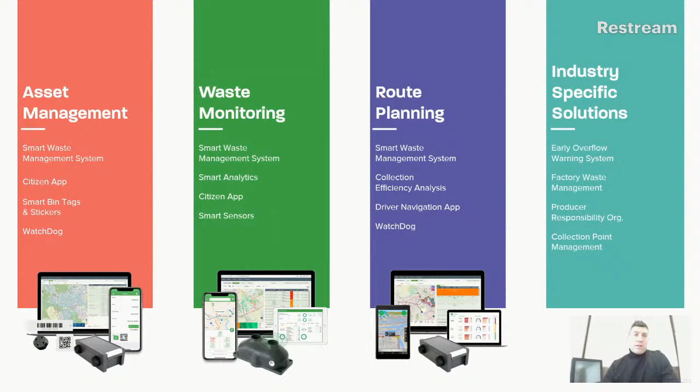Here is an example of how the sensors actually work, looking down into the bin. This is specifically a semi-underground bin, and in combination with the citizen application, a household wanting to deposit trash in the nearest container can check the citizen application, which is free for download on iOS and Android, to find which container to use and which is nearest.

You can see the position based on GPS location, and decide by checking the fulfillment level of each container. If you want to deposit paper and see the bin is full, you can choose another position, then find there is only 50% fulfillment, so you can decide to go there.

The citizen application also offers reporting and maintenance functionality, meaning every citizen can provide feedback if the stand was polluted, if it was full, or if there is some issue around it that needs to be solved by the waste collection company or the city.

For our smart sensors, we chose ultrasound technology, which we believe is most reliable and resistant to dust and dirt. We've seen laser technology options in the market, but they don't fulfill our expectations. Ultrasound eliminates service occasions where lenses would need cleaning, so this is a quite reliable and working solution.

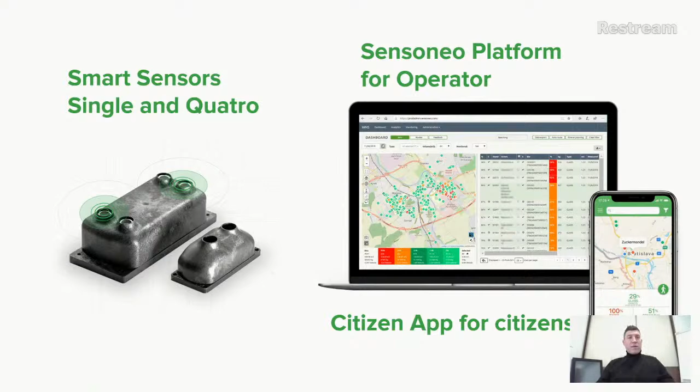Overall, the solution with these ultrasound sensors is that they are mostly inserted in the middle of containers to get the most accurate signal out of the measurement, and it can be set up for measurements up to 24 times a day, or even shorter or more - which of course has an influence on battery life.

This can also be integrated into third-party platforms, meaning we provide the API. Many partners implement this into their own systems because in previous years they chose a city platform that already has sensors for air quality, parking, and other IoT possibilities. So we can attach to the existing platform environment.

These sensors are made from military materials, so they are extremely robust, and they run on replaceable batteries. The indicator in our waste management platform shows when the battery is running low, indicating the need for service to change batteries. The usual lifetime for a single sensor depends on conditions like weather, but is mostly calculated at 4 to 5 years depending on measurement intervals. For the Quatro sensor, it's expected to last more than 10 years.

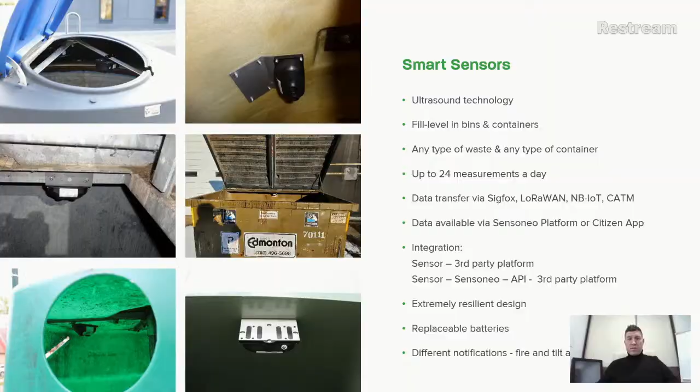Example of the single sensor. This is the view from the glass collection point with bottom emptying. Single sensor split is also available for small bins, which is important to recognize—this single sensor split is able to measure from 1 centimeter up to 2.5 meters. We'll see more examples further on.

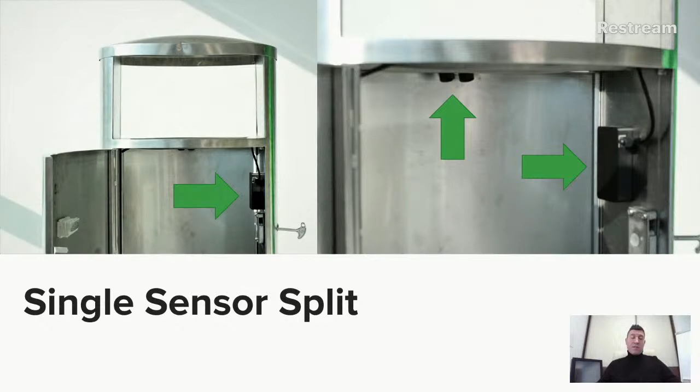For the Quatro sensor, it has the possibility to measure up to 6 meters from 15 centimeters. It has GPS and is more precise in the Quatro option, so it's more suitable for semi-underground and fully underground bins.

Our Sensoneo platform is a cloud-based platform working on Microsoft Azure, processing live data from the sensors, with an interactive map shown on the left side. This is usually the working environment of the partner, city, or waste collection company, who can see where the deployment is done.

On the right side, there is a detailed bin database showing the stand code, street location, GPS position, specific bin code, level of fulfillment, type of waste, and actual weight calculated based on inserted prescribed values.

They can also choose the route planning option for collection, which is part of the module in the WMS. They can choose the route manually or use the auto route option, which calculates the best cost-effective way.

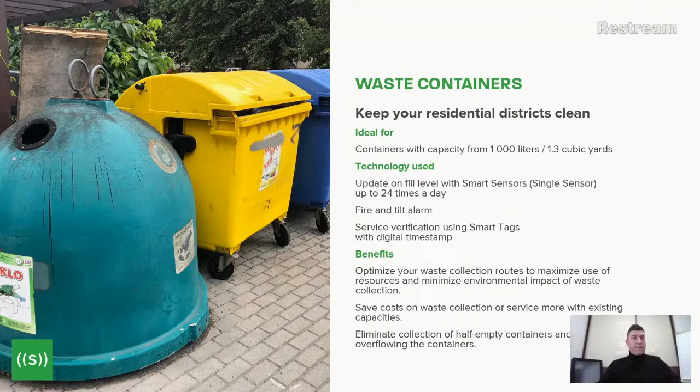For semi-underground and underground bins, it was also most important to set the right collection frequency. However, these are huge containers, and there are activities on how to deploy more of them in cities where density is quite high due to citizens living there and deploying trash, so they can change from this 1,100 liter bin to nicer stands, improving the quality of the service.

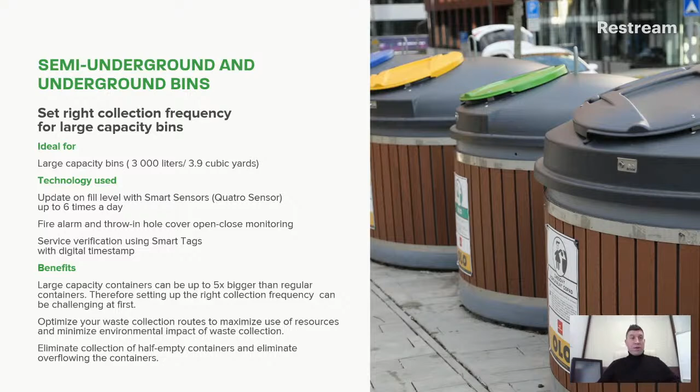Also, you can find it in waste compactor monitoring. These waste compactors, which process cartons or packaging material from paper, press it down, and you can see inside the fullness level.

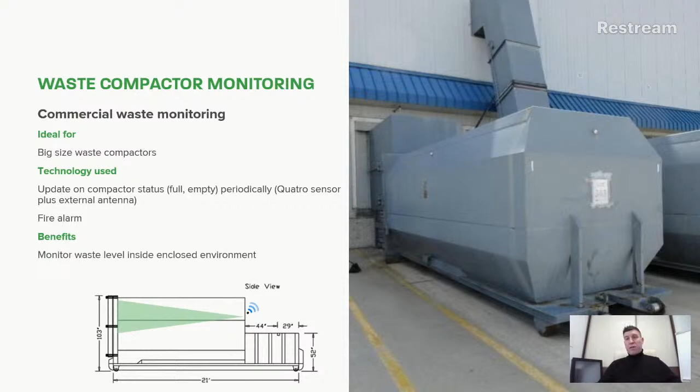Also, our important customer from Czech Republic, I will mention further in the presentation. For electronic waste, it's important to see inside, because they have deployed more than 25,000 containers all over the country. They cooperate with third-party companies who collect this electronic waste. The main target was to optimize and get knowledge about when it's good to collect this material and what kind of material is collected. It's also service verification with smart tags using a digital timestamp.

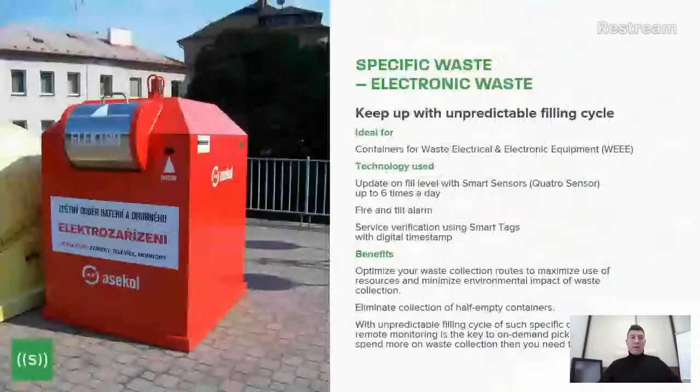Currently, in cooperation with the company offering this service, we have developed together the software, which is also in our capabilities, so we can provide this service based on demand - not only a waste management system, but specific custom-made software for the purpose.

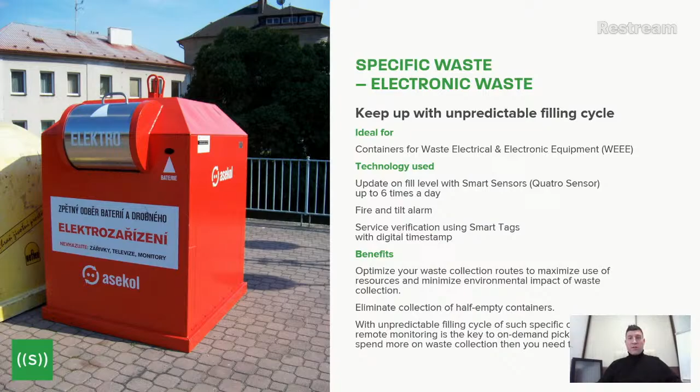Both in clothing and shoe recycling, you can see it's a completely metal case, closed container, and it's really important to see inside and check the level before it is collected. Fire and tilt alarms are also important to prevent vandalism for such containers.

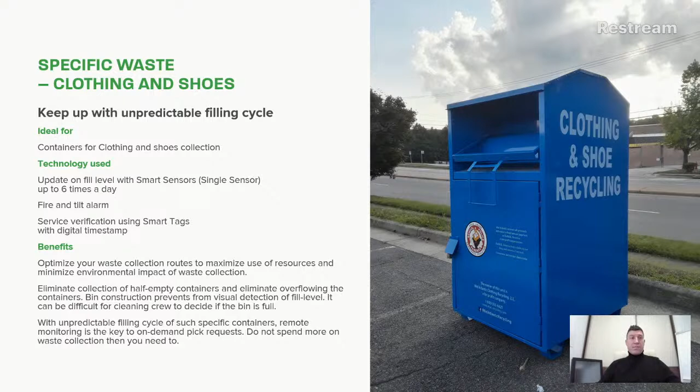Another - not ultrasound but floating mechanism sensor - is our Octopus device, used mostly in manholes. Along highways there are manholes which collect rainwater and separate oils in order to prevent catastrophic scenarios. If it's overflowing, you can imagine this slicky fluid is on the highway, and it can cost a lot of lives. So this is like a preventive action.

It has 3 different thresholds - you can see this black box here on the side as well. It can be divided into up to 3 measurement levels, up to 25 meters, and it gives the GPRS or GSM network the signal of the actual stand of the underground water.

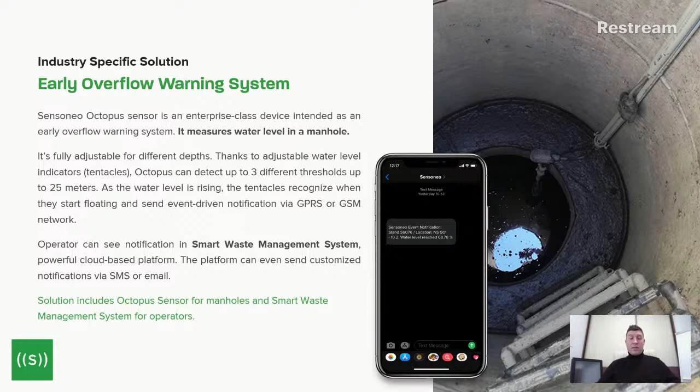We say that all the decisions which need to be taken are data-driven decisions, so it's really important to know and get the data in order to process it. At Sensoneo, we are enabling that, so you can take really, really good decisions based on it.

Some of our references: here is the partner, a usual city, mid-sized town, with 150,000 citizens, yearly collection around 48,000 tons of waste from 23,000 bins. The scope was that we had to adjust the waste collection schedule to accommodate new large capacity bins, to preserve resources, and to try to eliminate waste and costs. We used waste monitoring with our ultrasound sensors, and then planned dynamic collection routes based on this data. In the end, we found that by easily checking this level filling, we could save more than 30% on overall costs. Currently, we have deployed 498 bins, so you can see there is a really working environment and reliability in place.

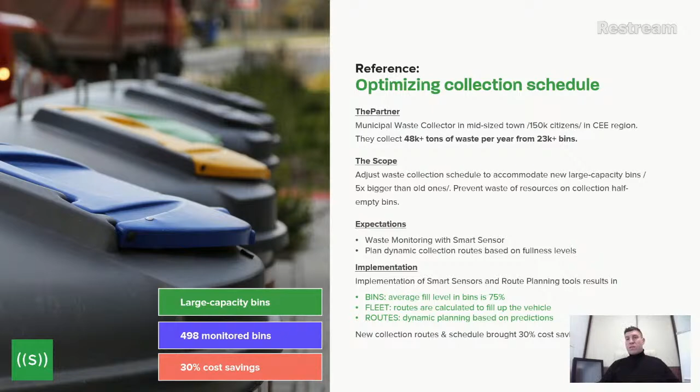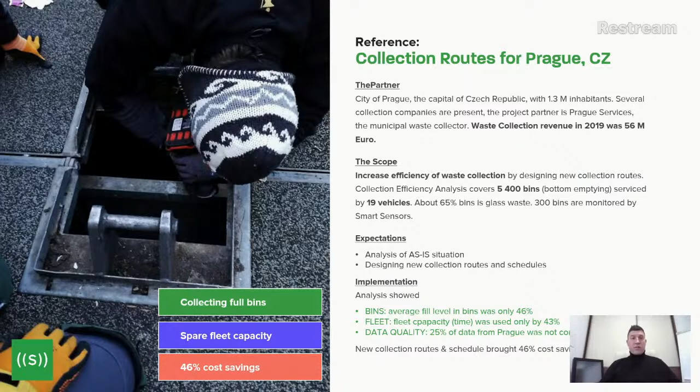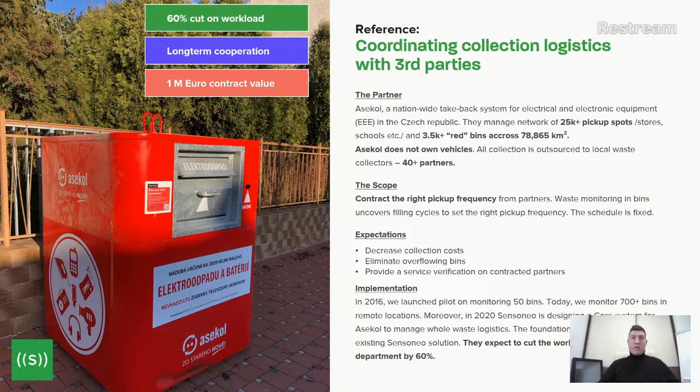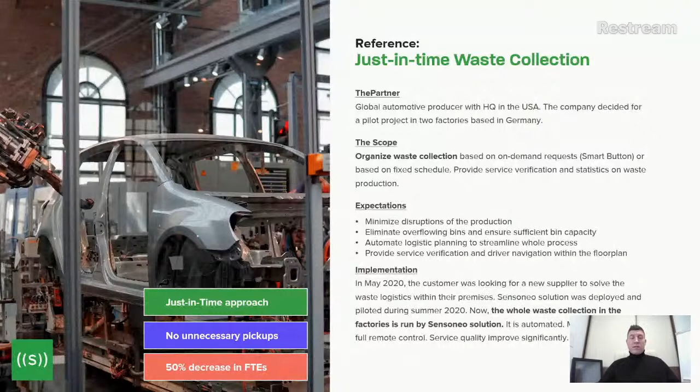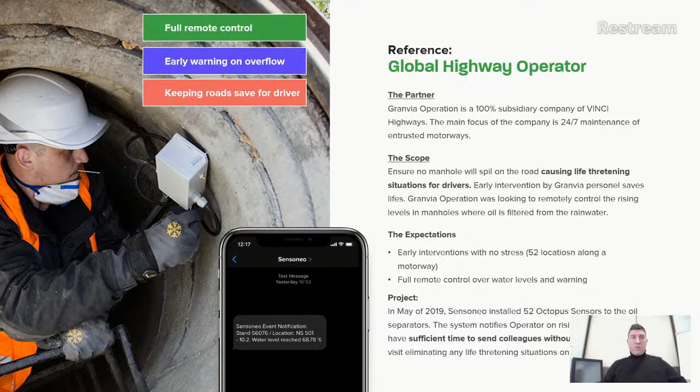All right, this was quickly it. I hope you enjoyed it—now I'll take a look back to see if there are some questions from you.

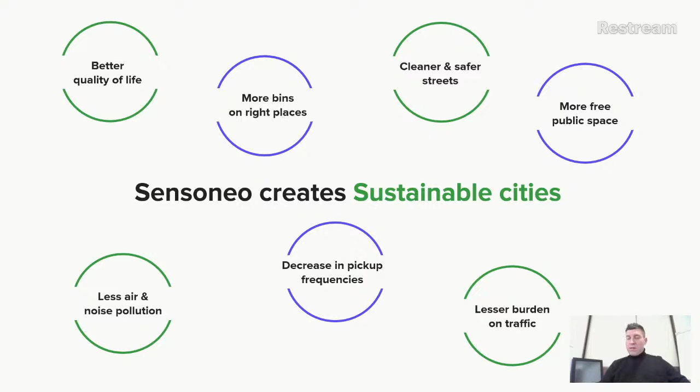By learning the filling cycle of the bins or stands, you can adjust the fixed schedule or collect on demand. This can be done either on demand, or we can check if the fixed schedule was followed correctly. We do the analysis and the collection based on measured data, and compare it to the plan—how it should be done according to schedule versus reality: what was the time, what was the cost, how many kilometers were spent. All this data is available in the waste management system.

We have a question from ElMehdi Habib: what is the main optimization using the sensors? If I understand the question correctly, the main optimization using the sensor is that you know the actual level of waste inside the container, and based on this you can decide the most effective way to collect it.

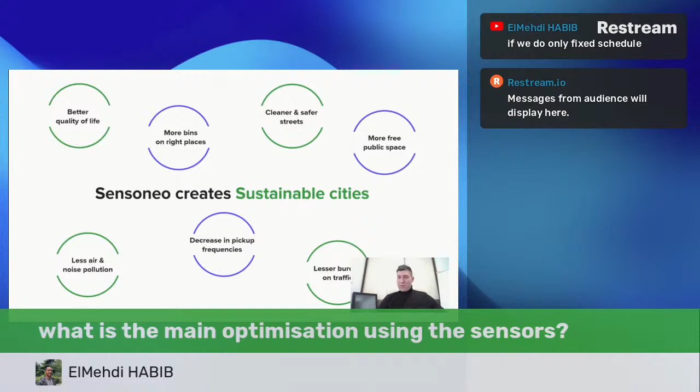Also, my colleague is trying to answer the questions, as I can see.

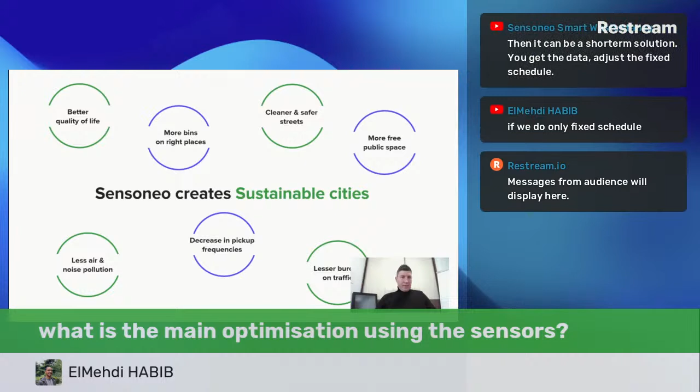If you do only fixed schedules, then at least you can find—you can adjust this fixed schedule or collect on demand.

All right, I'm not sure if there are any questions. I need to ask my colleague what further information we can provide.